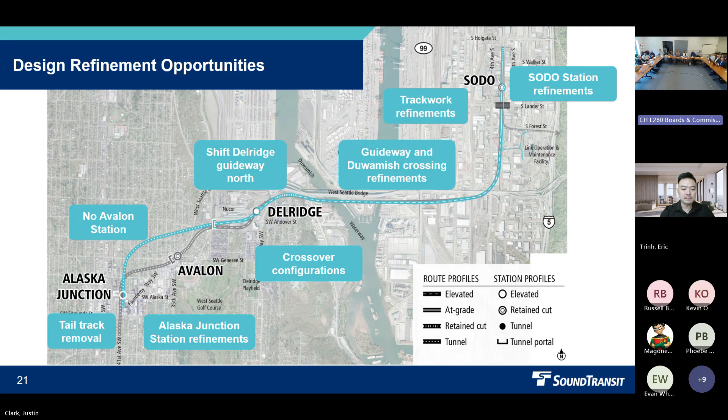So some of the ideas on here were good ideas, and we looked at a lot of these. We were able to validate many of these. So I'm going to go through kind of east to west, and we're going to talk about some of these. I won't read every call out on this slide because then Gavin's idea will come true, but you're going to see a lot of it as we go.

Before we do, I know that we talked about the no Avalon alternative. So when we looked at the Avalon station in West Seattle, it had a unique alignment between Delridge and Alaska Junction, a lot of surface construction, a lot of property impacts from that station. And while it's a really important station and provided service to that neighborhood and good bus connections, it was one of the lower ridership stations. So it was a consideration in the EIS that it might not happen.

But as we looked at cost savings, it had some pretty big direct cost savings from not building that. You can see the gray line there where the FEIS alignment was, or the record of decision alignment, and then the blue line, which is mostly tunnel from that bracket at the top to the west. By not building that, we reduce the number of impacts, but key, we unlock tremendous additional cost saving opportunities. I'll describe some of those as we go through it, but it moves the dial big time.

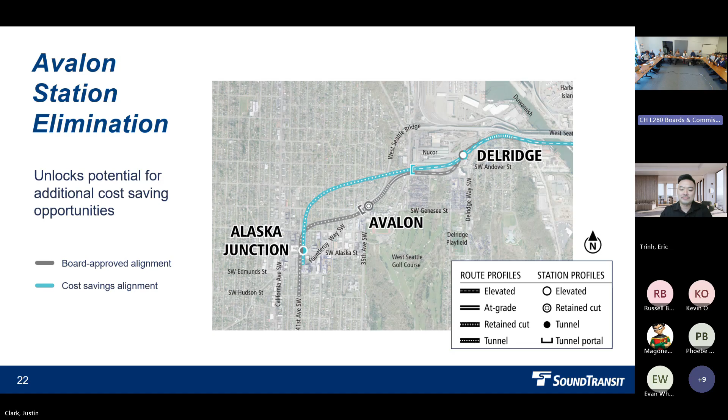So we'll start in SODO and the Duwamish areas. Next slide, please. So this is an overview of the SODO station, and if you all remember the SODO station from the PE reviews, there's a lot happening at this station. So kind of to the north is up and to the right. You can see the USPS carrier annex garage there at the top left.

So one of the key parts of this station is it's going to be one of the more well-transferred stations. It's a key transfer point between the 1 Line and the 3 Line—the last transfer spot to the south for people between the 1 and the 3 Line. So it's really important that we have good connections from one platform to the next and then beyond. We did that in the previous design by having a lot of elevated structure, a lot of escalators, elevators, and stairs.

As we brought our designer on board, which is our EDS designer, engineering design services, Jacobs Engineering, they really looked at this closely, and they looked at a solution where they concentrated the access and the connections between the platforms at the center. So bringing people kind of naturally where they want to travel, with sufficient number of escalators, elevators and stairs to get people up and over. They've come up with a configuration like this. You don't see it side by side with the previous configuration, but there's a lot less elevated structure, and a lot less need for elevators and escalators because they're more consolidated.

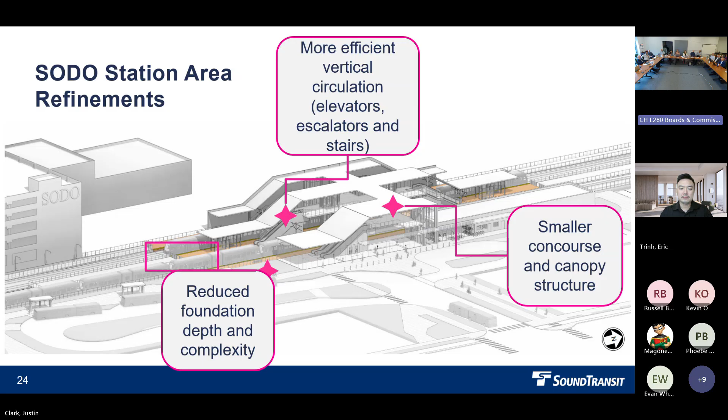Not only does that save you money above ground, but the soils in this area, as Brian's talked about before, are really bad — some of the worst in the city. It's built on tide flats, so anything you see above ground that doesn't need to be built is money we're not putting in the ground. That money can go into improving station access and improvements. So that's a big change there.

We still maintain a really great connection to 6th Avenue for buses and people accessing the station, and maintain some transit-oriented development potential there.

Another refinement the design team looked at is the Cable Stay Bridge, a long span bridge over the West Duwamish Channel. It's a navigation channel, so it requires a height of 140 feet, matching the West Seattle High Bridge. In the previous design, there were two rows of cables, with trains running between those rows of stays.

With this design, they simplified it — building the decks on the outside of a single cable stay configuration, and simplifying the towers. You still get that same iconic look, but it's simpler and more efficient to build, and it saves money. Again, the foundations in this area are massive, so anything we can do to add efficiency there saves a lot of money underground.

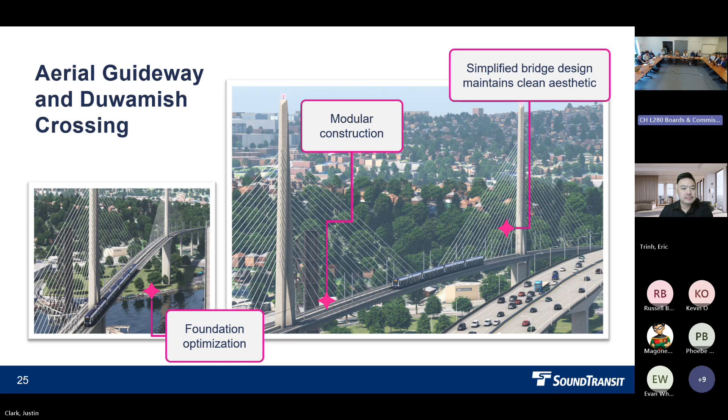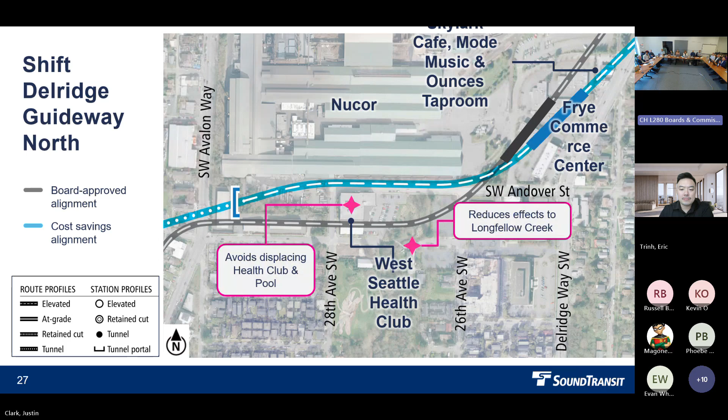Now moving out to Delridge, this is where we see some of the bigger cost savings. I'll spend some time on this alignment because we've talked a lot about the transition from the Delridge station, at the top right here, north is up. There are some key landmarks in the West Seattle area, including Nucor, Mode Music, Ounces, and the West Seattle Health Club.

In the FEIS alignment, one important part of the station location — shown where that gray line is — was because we needed two things. We needed really great transit integration between the buses and the light rail station. 90% of the people accessing this station will arrive by bus, many from communities to the south and the Peninsula — our racial equity toolkit communities. Enhancing access for those communities was our priority.

As we did that in the DEIS alignment, we saw the station follow that blue line, but it continued west of Avalon Way. That impacted a social service provider called Transitional Resources. For that reason, we needed to move south to the gray line so we could have an elevated guideway and not displace those really important social resources.

But now that we've looked at an alignment with no Avalon station, we can look at the tunnel portal, which in the EIS was further west, near the West Seattle Bridge connection to Fauntleroy. Bringing the design team on and looking at it more closely, they identified a better location at the storage site just east of Avalon Way — a property that would have already been needed for the project, but it's a more efficient portal site.

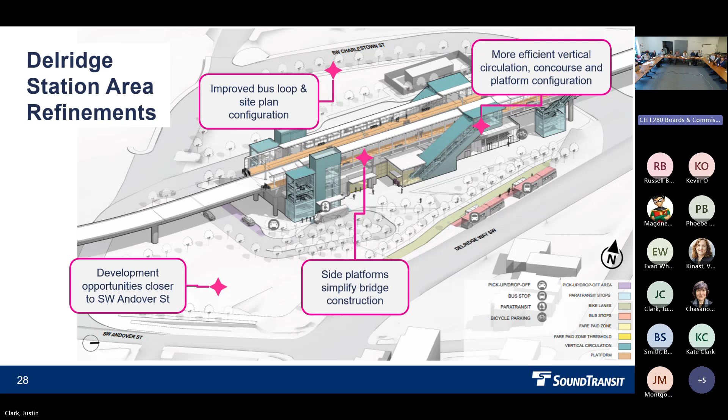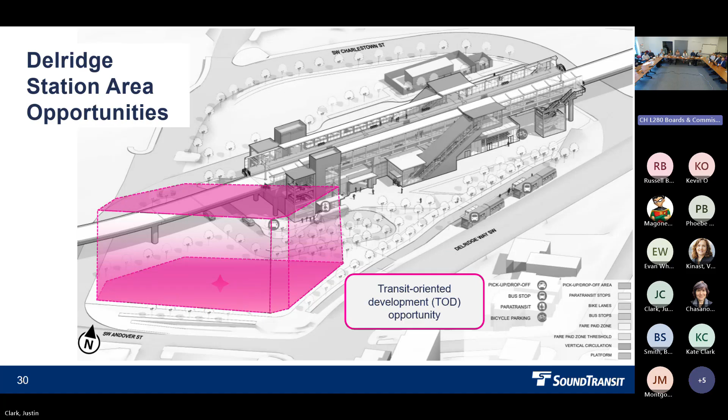By moving it to the south, closer to Delridge Way and Andover, we create more connections to the community. We also separate the construction of the station and the TOD, which could help us succeed in delivering these along the same timeline. So it's going to be a fun topic moving forward, but this is where we're at with the Delridge station at this point.

Next slide, moving to Avalon. The boxes on this got a little funny, so it's like a puzzle, but it's the machine bored tunnel and tunnel portal. Just a couple of things on the Avalon station.

We know it's not a good thing to eliminate a station, and we don't take this lightly. But some of the things we've looked at through this work is how we're going to provide the bus connections to the community so we can continue to serve those connections.

Fortunately, the bus connections at Avalon Station are also either serving Alaska Junction and Delridge with this project, or can easily be rerouted to those stations. So we're able to pick up those riders at the station.

The walkability for the Alaska and Avalon Station and the Delridge and Avalon Station has some overlap. It's not containing all of that Avalon walk shed, but there's some good overlap, so we're able to pick up a lot of those walkers, and others will connect through transit. But the big thing here is by moving the portal to the east side of Avalon Way, where you see that pink bracket, you avoid that entire gray line, which is mostly above ground, and you're in a tunnel the entire way.

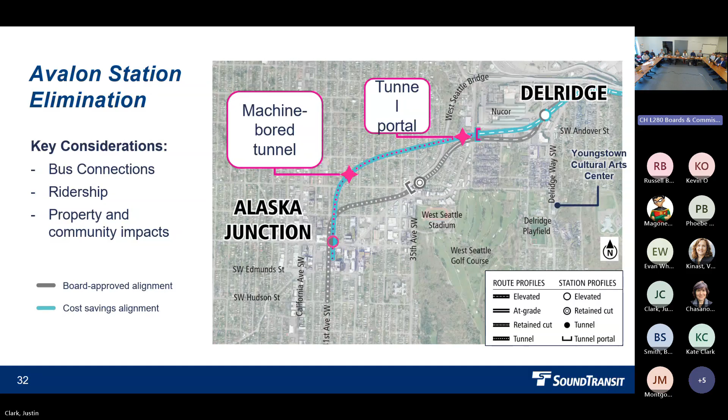So when we look at what that means for the properties, next slide. With the Avalon Station, all of these boxes shown, the polygons around the properties in purple, those would have all been acquisitions and displacements. Some of them businesses, most of them single-family homes.

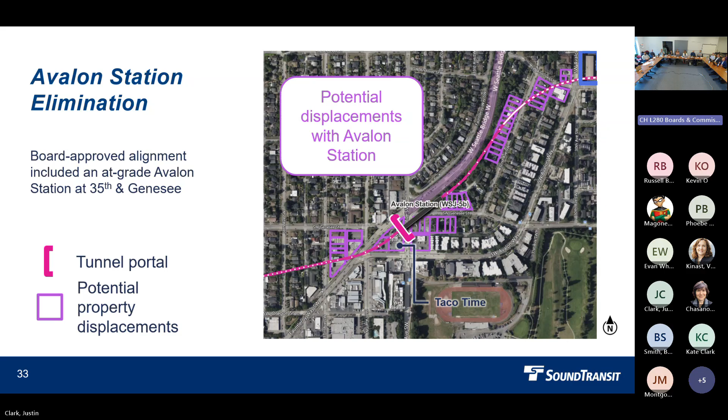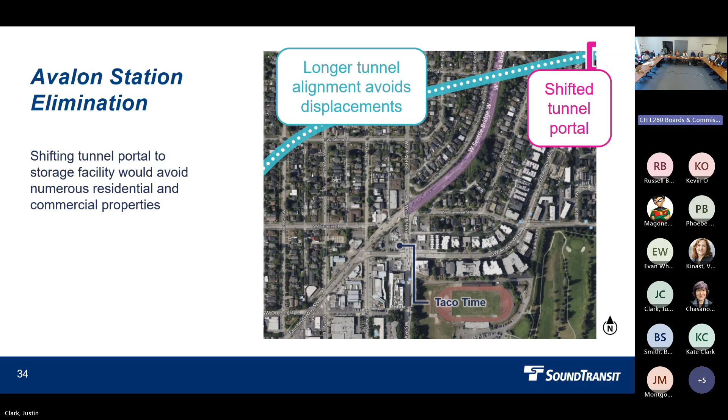When we don't build the Avalon Station and move the portal back to the east side of Avalon Way, we see this change. We will not need to acquire any of those parcels. So when we're thinking about reduction in impacts and reduction in costs, it's a really big thing here. We've had a number of conversations with the neighborhood and the community, and there's a lot of excitement about this change. Overall, the ridership without the Avalon Station drops by about 200 riders, which is a really small number when you're thinking about the tens of thousands that'll be riding this system.

The tunnel gets the train to the platform. The train comes over the platform, stops, and all the riders get off. Then the train needs to turn around to get to the other track to go north, and to do so, it crosses over on a crossover to the other side of the track. It goes to the tail track, the operator gets out, walks to the other end of the 380-foot train, gets in, drives back to the platform, and picks people up. All of that takes time.

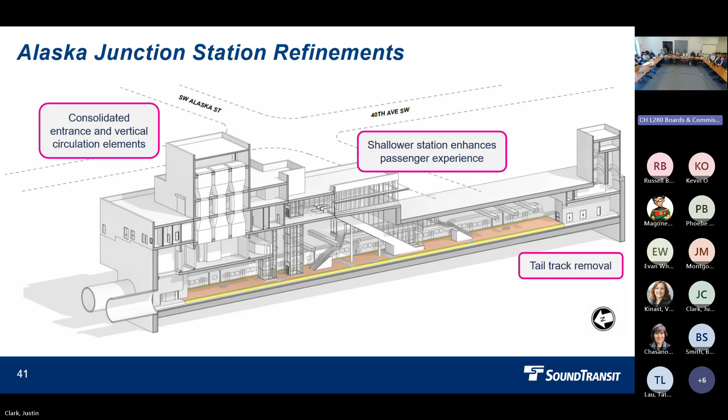So the work on this station really begins to work it into the community. But these are some of the things that we would work with you on at the upcoming sub areas, and then at the 30% design as well. So this is to wake you up if you're already asleep. We have work for you. And then the next slide.

So I got a couple more. Good.

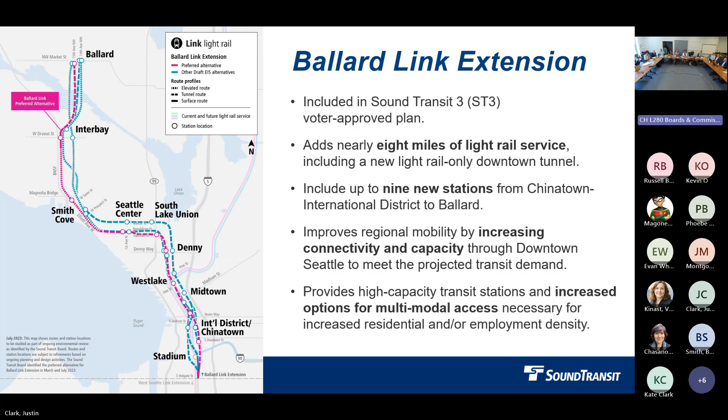For those who don't know, the Ballard Link extension was included in the ST3 voter approved plan, and it adds nearly 8 miles of light rail service, including a new light rail only downtown tunnel. It has up to 9 new stations from Chinatown International District to Ballard, and improves regional mobility by increasing connectivity and capacity through downtown Seattle to meet projected transit demand. The new tunnel is part of that capacity question - it provides high-capacity transit stations and increased options for multimodal access necessary for increased residential and employment density. On the next slide, we'll talk a little bit about the recent enterprise initiative, and Sandra gave a great overview.

We'll go a little more in depth here. In the updated ST3 system plan approved by the ST3 board, we established a phased approach to delivering the full Ballard Link extension from CID to Ballard. It fully funds the initial segment to Seattle Center, including construction and design, and confirms planning and design will continue for the full BLE project.

We were directed by the board to return by August 1st with a date range for the ultimate delivery, so we're working on that. We're continuing environmental review for the full project, with the updated draft EIS expected later this year. That's a touch point we're really looking forward to with the SDC. We appreciate the letter you sent outlining what you're looking for.

We're also directed to use planning, environmental review, and final design to identify additional opportunities to reduce costs, reduce community impacts, and improve project delivery. We're working on that behind the scenes. The agency and board are going to pursue additional funding, financing tools, value capture, partnerships, and cost-saving strategies to support delivery of the second segment from Seattle Center to Ballard. This is very recent news, so we're still integrating it, but that's the general lay of the land.

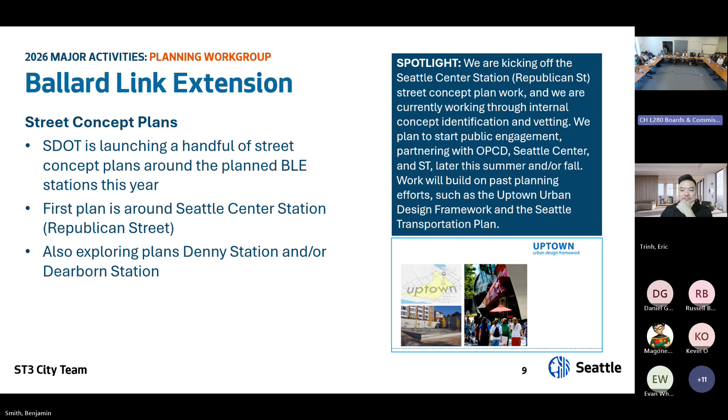We're also starting to think about other street concept planning areas we want to do for other stations. We're looking at the Denny and Dearborn stations as places we're interested in advancing street concept plans. Specifically for Dearborn Station, a lot of that would build on the work done as part of the South Downtown Hub work—the joint ST-led project the city's been very involved in over the last few years. That would mean taking those plans and advancing and extending them maybe beyond the extent that the South Downtown planning process was looking at for areas around those stations.

So this spring, I think April and May, there was a survey of the public that focused on the transportation improvements around the station that are needed. You can see the map of the areas we're looking at. That information will feed directly into both the station area planning and the access work I'll touch on. Later in the summer, there will be a second phase of information focusing more on the land use changes happening around the station.

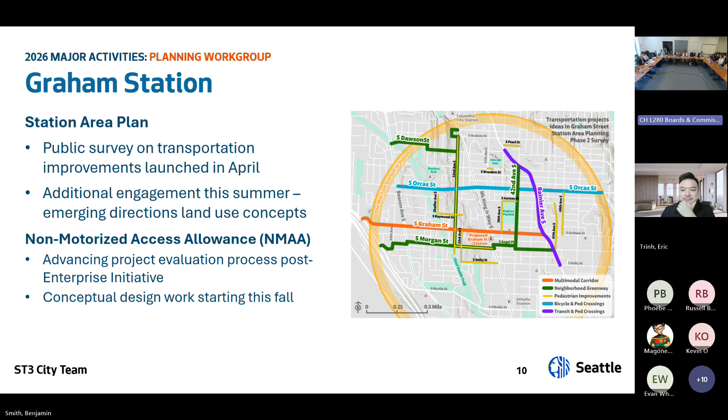Then for the non-motorized access allowance updates, we have $5.5 million for construction of projects. We're a little earlier in the phase, so we're now identifying potential projects around the station that we're interested in doing conceptual designs for. That's probably what the survey will be informing. Later in the summer, we'll do a screening process to identify from our broad list of projects which ones we actually want to use the planning and design funds for.

That's where I'm going, and back to Katie. So TOD planning, we'll talk about two buckets: one is the city-led work about equitable transit-oriented development, and the second is supporting Sound Transit's work advancing their TOD. I'm going to do my best to be Alberta Black today, who's running this program and couldn't be here, so I may not be able to answer all your questions, but I'll do my best.

Our ETOD, or equitable transit-oriented development work, is funded by an FTA grant for $1.75 million, focused on community-driven solutions to displacement pressures often associated with light rail construction. There are a couple different pieces to this grant. The first is a community advisory group, a citywide group working through a series of modules on different planning and community development topics, with internal and external guest speakers and subject matter experts, lots of discussion. That group is working toward a set of policy recommendations that will be finalized this fall.

Our place-based groups, the second bucket, are two: the CID place-based group and the Delridge place-based group. These look more specifically at those neighborhoods in terms of what ETOD might look like there. The CID group is underway, starting to meet right now or maybe last week. We'll be launching the Delridge place-based group in the next couple of months. Again, these are trying to get to preliminary project development, turning those projects into cut sheets so they can start figuring out funding. It's really about bringing in organizations and folks who have great ideas for equitable development projects and helping get them off the ground.